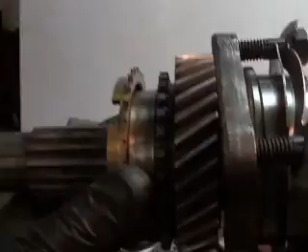Okay, going to take you off the stand for this, and like we were looking at in the other videos, this is your synchronizer ring. It acts like a brake, it slows it down. How do you know when it's worn out?

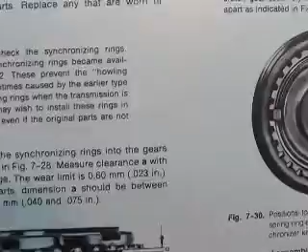Well, we're going to just look at the page right here, and we're gonna look at some notes here. You can read them yourself, I'm not gonna read them to you.

What happens is, as the hub is pushing this in, and as this is acting as a brake to slow it down, it won't slow it down enough. It won't actually be gripping on this part of the hub, and the two sets of teeth will start to touch, and you'll get that crunching noise. It usually starts off, and you'll notice it when the car's cold, and it's like, oh yeah, that's not so bad, it just crunches once in a while when it's cold out, and then once it warms up it goes away. Well, stop - that's if you want to save that transmission, if you want to rebuild it, that's the time to start getting into it. If you continue driving it that way, you're going to trash it.

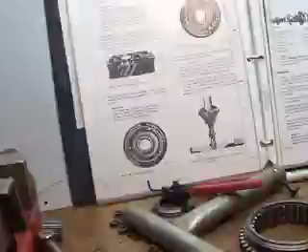So what you're going to do is slide it right here between this gap, and just like adjusting your valves, you're just going to feel it. You want to put pressure on the ring. I can't hold the camera very well and do that at the same time, and I don't want to use the stand just yet, but you get the idea.

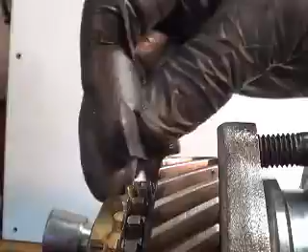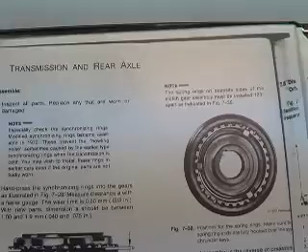Now here's another way, when the gear is not in that stand, and it's probably better, and that's the way it shows in the book - you can just slide it right in between here and you can feel it. The book calls out between 75 and 40 is what they really would like to have. So the wear limit is .023.

So this one would be good on this gear, but the other one over there on the stand, this is too tight, and we haven't even started to look at this one that is actually the donor that we're really going to be using. Now here is the problem with jumping out of gear.

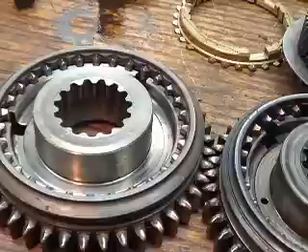These are the slider hubs - three examples of first, second gear slider hubs. They're used, let's just take a look at them. What jumps out at you when you look at these just sitting here side by side?

I notice that this one right here, the corners of these reverse teeth are pretty rounded and shiny. I don't know if I can get the camera angles - it looks like it's focusing pretty good. And then we'll look at these two over here - look at these rounded edges here. That's from grinding on reverse, not finding it and grinding it.

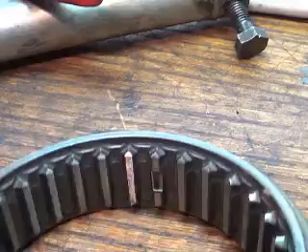Okay, now as we look inside here - man, okay, see this one here with a black mark? There's three of those. That's where your detent's going to rest. We'll talk about that more later, but that is the section that your detent rests in.

Now in your center hub, you've also got a big slot right there where my thumb is, right here. That's where the detent rests. You have to line those two places up to make room for the detent. Man, this is really hard to do.

Okay, look down there in the slot and you'll see that notch. You got 3 tries. What you want to do is move your gear around, first try at one position and move it back and forth, up and down.

Now this is dry, but you'll notice you get grabby ones. You'll get grabby, and you'll move it to the next spot, and it'll be real grabby and hard to move. It catches, and then finally you'll find one spot. It's like the story of the 3 bears.

You're gonna find that bed that feels just right, and you're gonna say, okay, that's the spot I want to keep it in. Mark it with a magic marker on the side, mark your hub on the center over here, so you keep it in that spot. What happens with age and wear, these things are tempered.

They're no longer available. You can't get replacements for it. There is a company that has a tool set up that can regrind these ribs, just the edge of the ribs, and get your angle corrected from wear to use a new gear, and it will stay in gear properly and won't be jumping out all the time. But I'm going to have to contact that outfit, and the last time I talked to them, about 10 years ago, I don't even know if they're still around. They don't really want to deal with the general public. These are kind of like wholesalers.

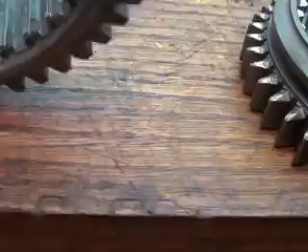All right, now you look at the ends of these ribs and you'll see the points on them, and how much wear is on them. Those two, now it's these inside pieces on both sides here.

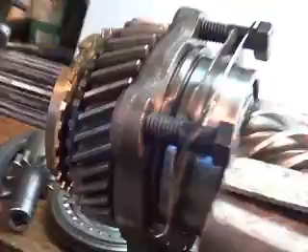You've got the gear side that sits in over here. It's just sliding over the gear. Let's just set it up here. This is what's meshing over here, this is what's going up over. These teeth on the inside, you want a nice sharp point so that it can just catch that gear and stop that ring, line it up, and engage fully. Now there's pressure on this.

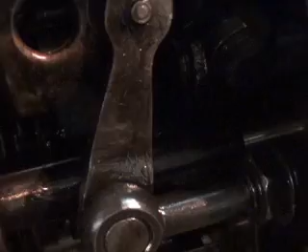These gear stacks, see, look at over here on this one. It ain't moving. It's not moving. And we were having trouble with shifting that one in the jig, so I'm suspicious that there might be some issues with that one as well. So those are some things that you want to look at.

Just looking at these three here, these old used ones on the bench, you could pick out and say this one in the center is probably the best of the three from looking at it.

And then when you assemble it and get it in the jig and get it oiled up and have the detents in place, you start moving it around, you're going to develop a feel. The only way you're going to develop that feel is by doing the work.

You compare this transmission, the first one you do, you got nothing to compare it to. You put it back in the car, you drive it. Oh, that felt great, man, this is perfect. I got lucky. Yoo-hoo! Okay, the next transmission that comes in, you do that one, and you think everything's good,

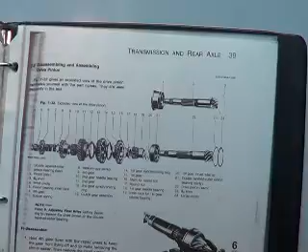and you put it in the car, and it don't work out so good. And you say, oh yeah, I remember that when I was putting it in fourth gear, it didn't feel right. So you're going to use pictures like this. This is really nice that it's got up there.

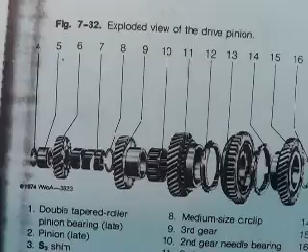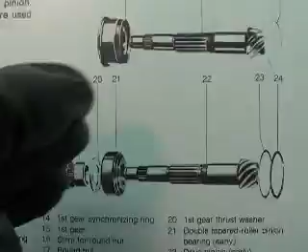You will, sooner or later, put a gear on backwards on the shaft. You're going to get so focused on what you're doing. But one of the things I noticed is that when you look at your gear stack, all of the angles are the same direction. And I've done it myself - I put a gear on backwards, and then I have to press it off.

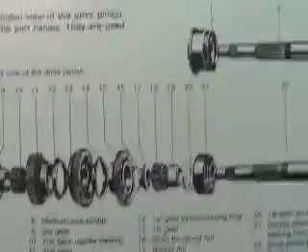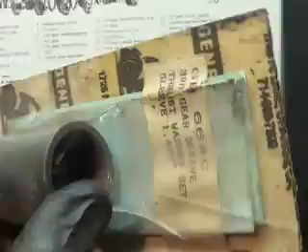Now see, on this new style transmission, you have a bending spring instead of a spacer. On the old style, with the keyed shaft, you have to use a solid spacer. This is a Berg unit that's made out of hardened steel. I've got a lot of the Berg stuff. I like that stuff. Okay.

Then there's a spring that goes in there. Then your synchro hub goes in there on that. Okay, we're going to push it down. That's not where it sits, but it fixes the light a little bit better, so it's easy for me to look at those tips. Look at those tips.

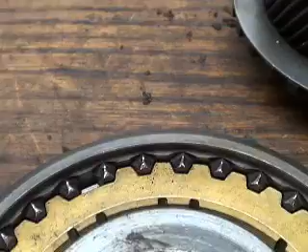You can see the wear, because here's a brand new gear that was never used. This is the same gear, I think it's the third gear. See how the edges of these crowns, those dogs, are sharp? They come to a nice V and they all look the same. Now look down here and you can see how the ends are worn off and rounded.

Here's a different one to look at. This one actually looks a little bit sharper. Let's compare another one over here. This one here, okay, you're going to have wear on it. You just have to select the one that has the sharpest corners, and that's how you decide which one you're going to use.

You can take it apart and look for signs of wear like this, but unless you do this all the time, I don't know that the average guy's going to tell, because you could be borderline. It depends on how much horsepower you've got, what you're doing with the car. Are you racing it, or using it for a daily driver? Have you got a stock engine or a high performance engine?

What kind of clutch are you using? A high performance clutch with a heavy duty pressure plate? Are you using some funky clutch disc in there that's real grabby because you think you're racing and you're really not? Those are the kinds of things you have to take into consideration, and you're only going to learn by experience.

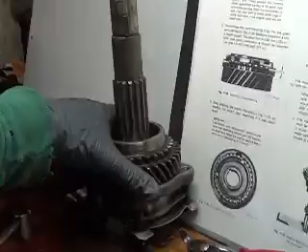The other thing you're going to find is the way the gear sits on the shaft. Now, I showed you in a previous video the difference in needle bearings. In the earlier ones it was a narrower first gear, and you'll just have to interchange them. Try not to mismatch your parts from one transmission.

When I actually made the commitment that I was going to learn how to build transmissions, I saw an ad in the newspaper—that ought to tell you how long ago it was. It said Volkswagen transmissions for sale, core transmissions, something to that effect. And I thought, cores, what are they talking about? So I called the guy up and he says, yeah, my son had a Volkswagen, and every time he broke the transmission he came to my house to replace it, and left the old one at my house.

He says, I want to get rid of them, come and get them. I didn't know a thing about them, and I said, well, this looks like the same kind that's on my first sandrail. How much for these four? And he says, well, I'd rather sell the whole bunch. I said, well, I know, but I live in a townhouse and don't have any place to keep them. I'd really like these four. Would you take $100? He says, well, I've got another guy supposed to come look at them. We started to walk away, and he says, $100, you got it with you? I said, yeah, right here. And I whipped out the cash, and he says, all right, I'll help you load them up.

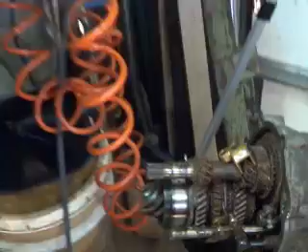I took them home, didn't know what I had, didn't know the first thing about it. Had the books, started cleaning them, taking them apart, and all these years later I've just got buckets of this stuff laying all over the place. I've moved 4 or 5 times since then, and never say no when somebody wants to give you Volkswagen parts, but understand you're going to have a place to store it. If you leave it outside, it's going to end up like this baby here, the first one we started on. It's going to get water in through that nose cone or someplace, and you're going to have trash.